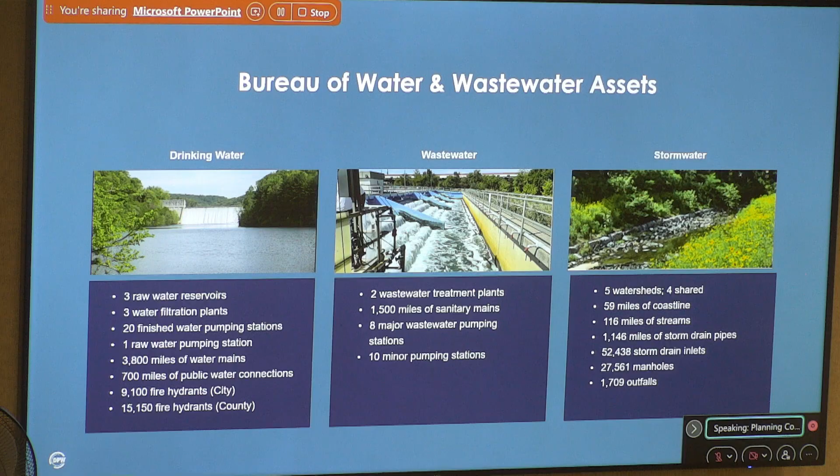So this is an extremely comprehensive, interconnected system. It's served us very well. For a long period of time, we did not invest as a city or region as we should have. A lot of that is coming back to bite us now, and that is why we have been making all of the improvements and investments that we have.

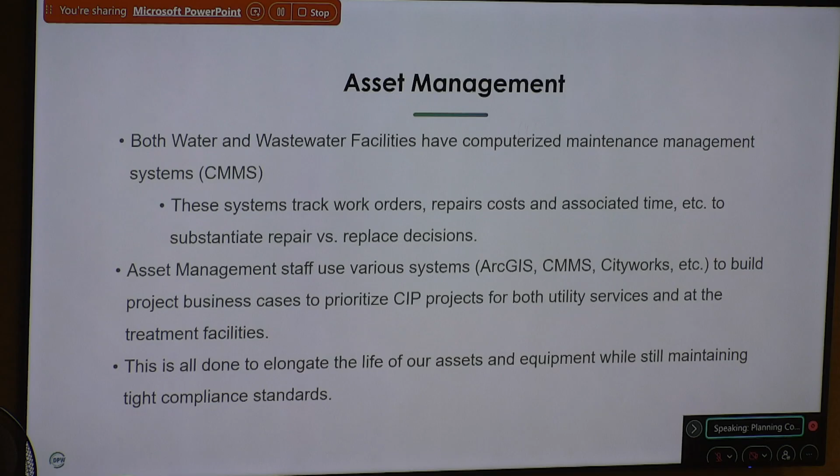So we are just like the biggest real estate holder in the state probably, or one of. Just a lot going on - huge system. If you haven't been to the places, we can invite you out to either a water tour or a wastewater tour. It's really something you don't pick up on until you're actually there and seeing, oh wow, if I go to this wastewater treatment plant I need a car to drive around it. It's so big - these are huge locations with just huge industrial operations.

Stormwater facilities, again, a fair amount of stormwater facilities throughout the city.

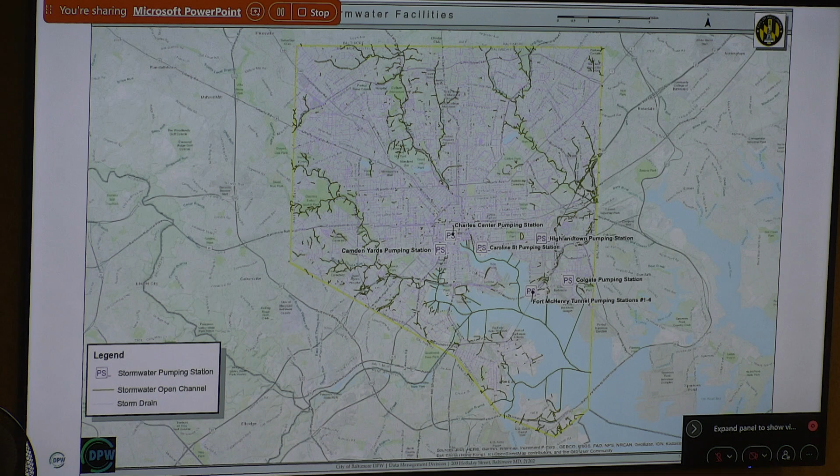Just an overall quick look at Baltimore City drinking water system. We have probably the greatest reservoirs, or one of the best sets of reservoirs in America. They really planned ahead, bought those reservoirs way back when, and so we pump that water source down. It enters the treatment plant facilities, either Ashburton or Montebello, to be cleaned, treated, and pumped. It's pumped out to storage tanks and held there until it gets out to you and your house. So happy to continue to provide you clean water.

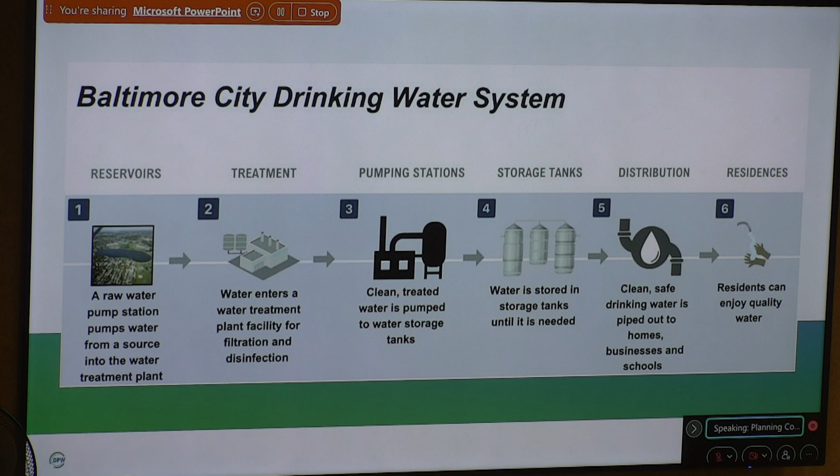It's intriguing because I told my kids about this job, and I said, I got this job and I'm in charge of the water and the wastewater. And they're like, we don't know what that means. And I said, well, there's pipes, and we do all these things. And I say, they just still think it's magic. They don't understand everything that goes into getting water into my house or the sewage leaving the house. But it is a process, and it is amazing.

Baltimore City wastewater treatment system - again, sewage will come from residential homes and businesses, travel through mainline sewers and pumping stations. It will go from the pump stations out to the treatment plants, and the clean water is discharged into water supply sources such as the Chesapeake Bay.

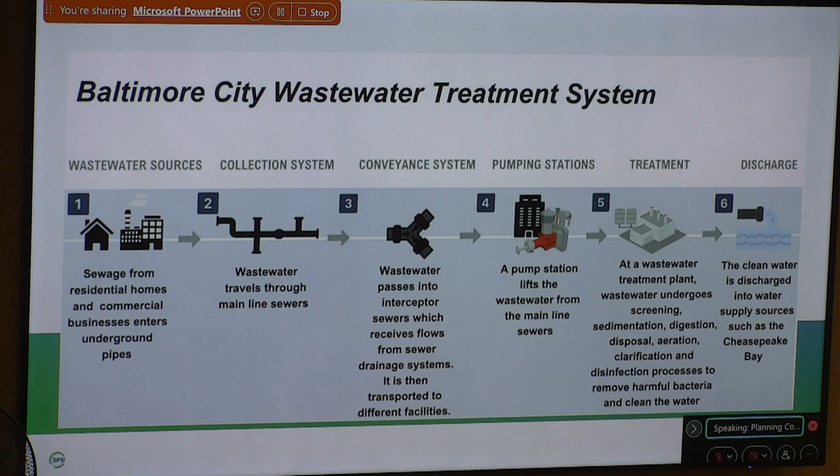So let's go into the wastewater utility, then storm and water, and get into it a little bit more. One of the biggest pieces behind our wastewater work is that we are under two consent decrees within the wastewater fund: a facilities consent decree to upgrade and make the plants all work, and a modified consent decree to make sure the pipes work and have enough flow so that they do not overflow.

The system was originally designed eons ago so that if a sewage system overflowed or got too full, it would overflow into a local stream. However, obviously times have changed and that's not the best practice, so we've been working to close those overflows over time, and I'll get into that as well.

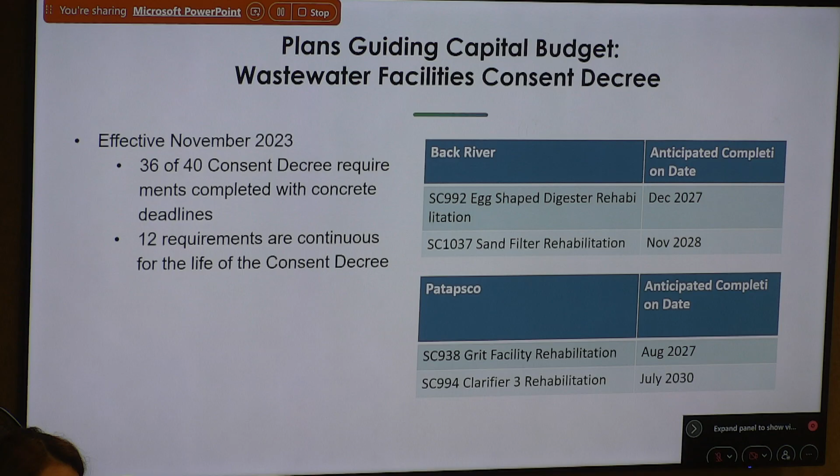The plants are working very well. This is showing suspended solids, which is an indicator of how well the plant is doing overall. We're really hitting our numbers. We've hit our permit numbers for both plants last year, and are really doing well at Back River, so much so that they're giving money back.

The state is giving us grants for high performance there, and Back River is looking even better this year. So we're keeping under the numbers, making sure that we provide the wastewater and hit the permits, and beat the permits as best as possible.

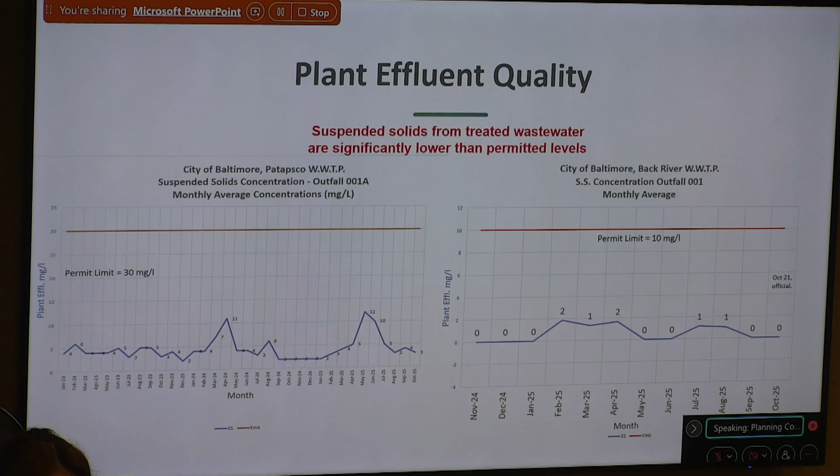Again, this keeps being a moving target over time. We posted for public comment on September 21st, 2025, updated plans. We have made improvements to reduce inflow infiltration, various system hydraulic capacity, and continued focus on closing all dry weather SSOs, that's sanitary sewer overflows, when the system overflows and spills out.

And we're working closely with Baltimore County on hydraulic monitoring so that we can coordinate with them. The system takes in a lot of sewage from the county into our plants, and the relationship has been improving in terms of really working together on the incoming sewage.

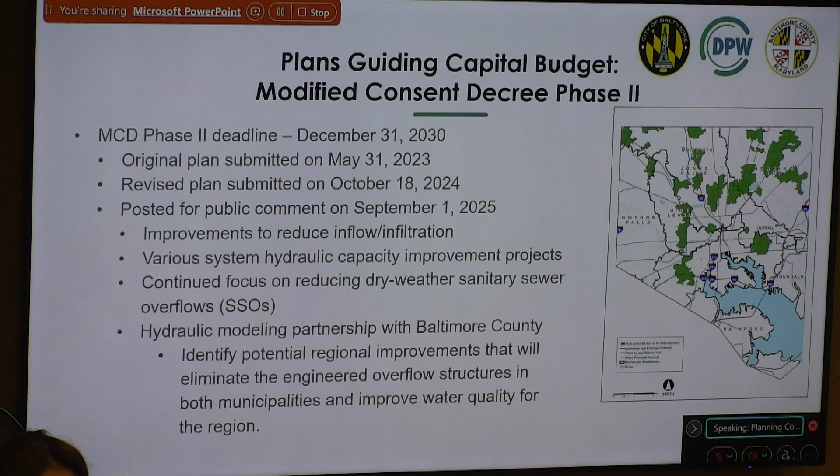We had a revised plan that we promulgated on September 1st. Plans and comment responses came December 15th, and we are looking for a new deadline because of the additional work needed to make sure that everything gets closed.

We're looking at this because of customer affordability, a balanced plan completion, financial constraints, and an adaptive management approach. So as we get to the questions, Paul can really get deep into this because this is a very important piece of what we do for the wastewater facilities.

Overall, we're looking at a large reduction over the last few years in the number of SSOs, which is the goal of the consent decree, and a large decrease in both the number and the volume coming out of them.

There are many projects, so we could have talked for like 16 hours straight about them. But one example: Phase 2, Herring Run Sewer Shed Inflow and Infiltration Reduction, Area A, estimated completion May 2027.

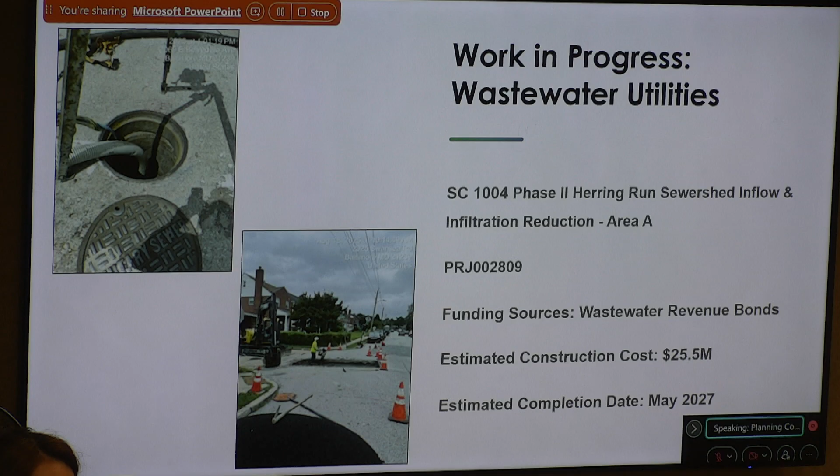SC 1020, CCTV inspection of sanitary sewers in Southern Baltimore City. A lot of the consent decree is actually us going and inspecting the sewer lines to make sure they're okay, and then repairing the ones that we find issues. So a lot of times we kind of set it and forget it in the past. Obviously, we can't set it and forget it. We have to inspect our assets and repair them.

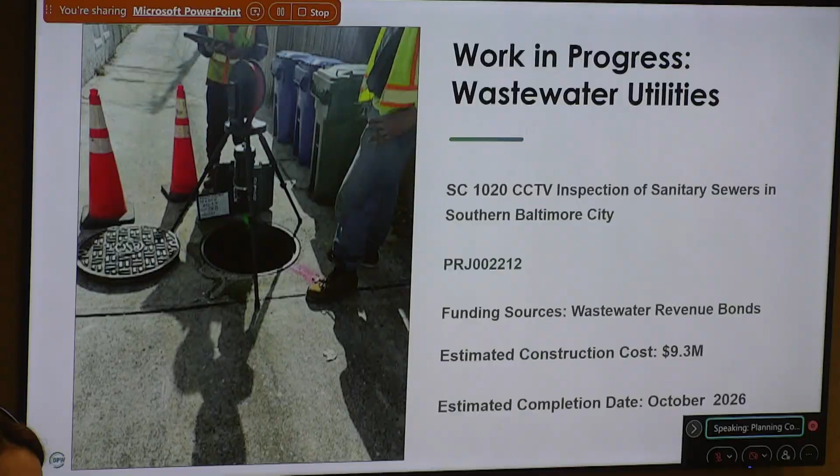Steve, to what extent are these third-party contractors, and to what extent are they city employees? I just don't really know what the balance is. I don't know, across the portfolio. I'm just trying to get a sense of it.

That really depends on what we're doing. So for the capital projects, it's primarily third-party vendors and contractors. The actual construction and contract work is primarily done by them, or nearly all. We have inspectors, inspection staff. We have some contract inspection staff, but we have a lot of in-house inspection staff. We are working to fill every vacancy on the inspection staff side as possible. We still have about 10 inspector vacancies left. We've been making a real push on that. So most of the work that we're going to talk about today is contractor work.

And I know some are smaller and some are larger, but at any given time, how many third-party contracts are you administering? 6, 7, you know? CCTV inspection. No, overall, the real contracts, the work being done. Okay, I thought you were making a 6, 7 joke like a kid, like my kids.

Across the utility, it's a couple hundred. Yeah, I would assume, yeah. Hundreds of contracts at any given time. Yeah, for sure. Thanks. I thought my kids would have loved that, Tim.

This is another interesting one, smaller than the larger. So, wastewater facilities design: we are designing a large number of repairs and replacements. Even though a lot of times we're talking about the consent decree, the facilities consent decree work was mostly at the plants. But before the plants, a lot of the wastewater goes through pumping stations, and you might not even know where these are. Sometimes if you drive under 95 on McComas Street, there's a little pumping station. Eastern Avenue is the biggest one - that's where the Public Works Museum is, that is a working pumping station, and it is amazing. So there's a lot of these pumping stations, as well as the wastewater plants, that need a lot of repairs upcoming.

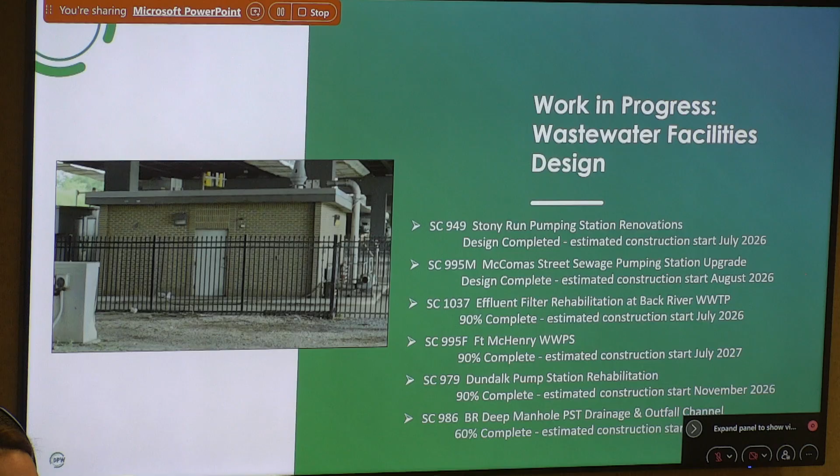Some other work in progress: Back River Scale House, electric distribution system at Patapsco, scum collection system at Patapsco, egg-shaped digester at Back River - that is a big one. You'll see the egg-shaped digesters; those help digest solids and will lead to a lot of cost savings. We have not been digesting, which means we have to find other ways to remove the solids that come into our system. And then renovations, more renovations, at Patapsco.

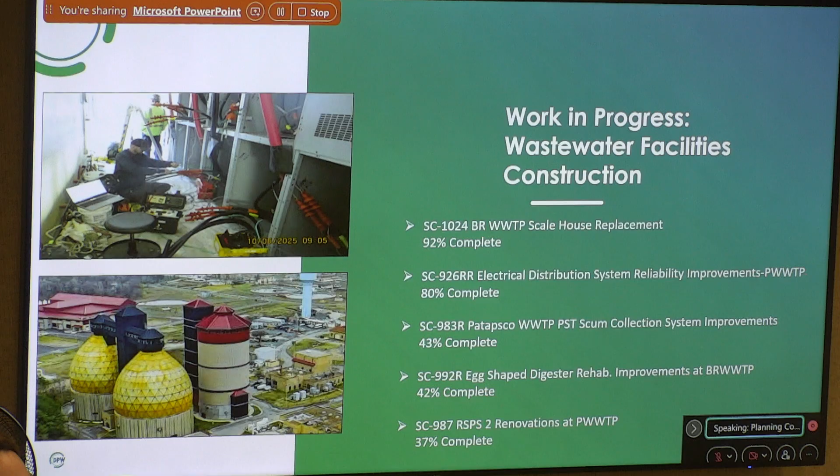Here are the requests, so you can look at all of them. We got a ton, just a lot going on. That's just for wastewater facilities.

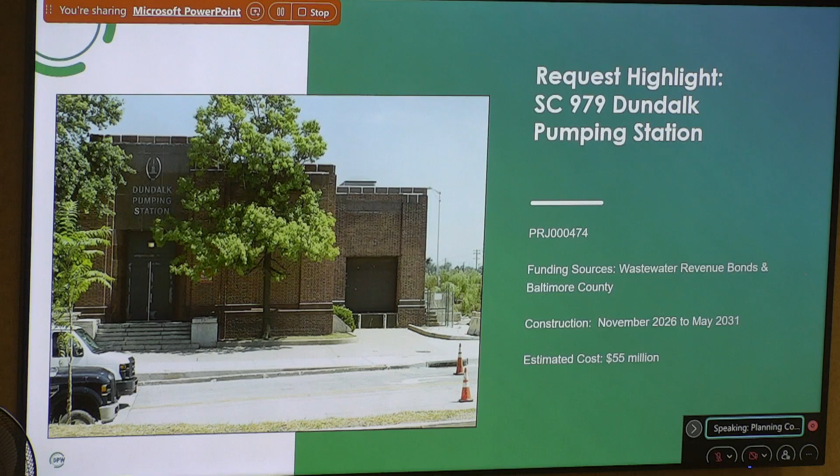Request highlight, Dundalk Pumping Station. We're working on this, hopefully construction next year. And we'll jump over to the stormwater utility.

A lot of the stormwater utilities work is based on the MS4 permit, which the state gives us following the Clean Water Act, covering impervious surfaces and whatever we're discharging into the streams of the city. So over time, not just us but the whole state, we have to improve the quality of water that runs off our streets, sidewalks, curbs, alleys, etc.

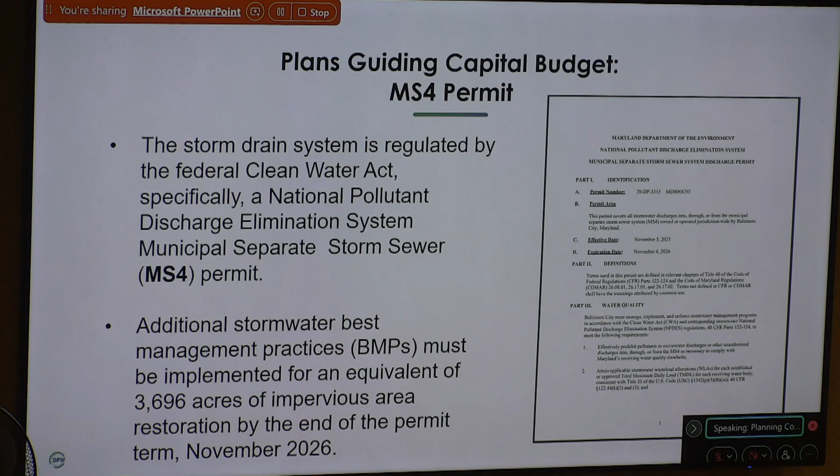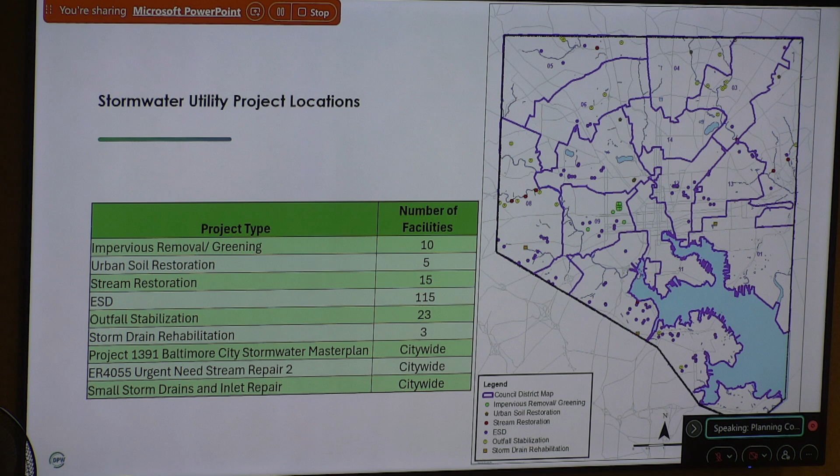We have a large number of small projects upcoming, some medium projects, as well as a large number of urgent stream and storm repairs that come up. We have a couple of shovel-ready projects that need improvement to ensure better environmental sustainability over time. We also have a fair amount in the bid construction phase, and a couple in the planning design phase. The upcoming ones are outfall improvements, and we have a lot of environmental site design projects.

We have to work closer with Recreation and Parks on these to improve our agreement on the amount of tree cover and related changes. Also, Maryland State implemented an act last year that requires increased public notification and a couple other things, so these need to be revised or fixed a bit at the end. So shovel-ready wouldn't be the accurate term at this point in time.

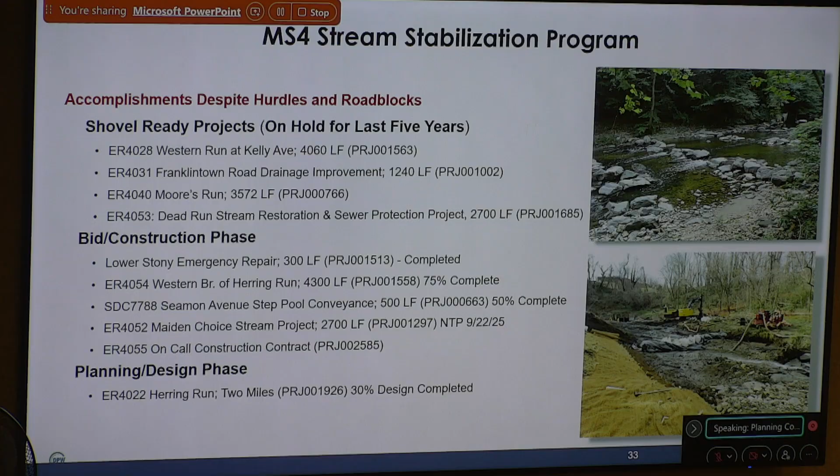So where are they in the capital budget, for example? Those projects that have been on deck? They're not this upcoming year. Are they in the budget in out years? Yeah, they're in previous years. This is stuff that we've already funded but not spent, because of these reasons. Correct. And this is focused on stormwater.

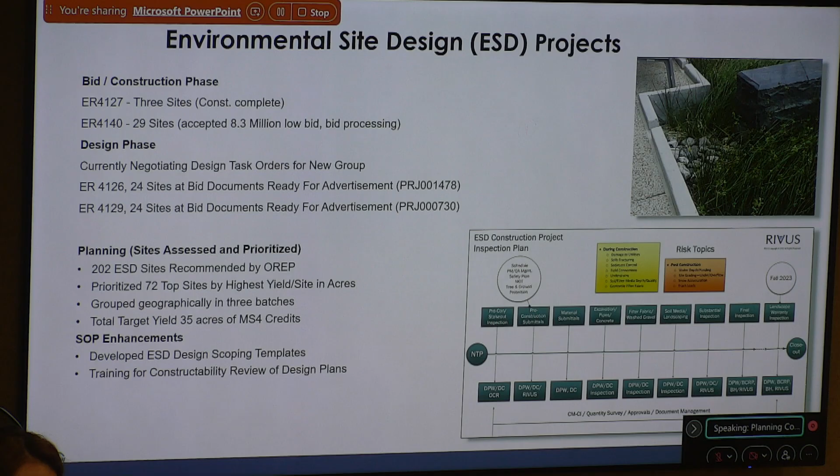So we have environmental site design projects. This involves a lot of little locations where we remove impervious areas and do bump outs. Some people like them, some people don't, but they are best practice.

About those sort of small projects, the environmental site design, impervious removal - those projects have big community impact, and I'm wondering how these sites are selected and how that's coordinated and where that work happens. A lot of times we're looking for sites that have the best bang for the buck. There aren't always a lot of opportunities, but if we find a school or other site with a lot of impervious surface that wants to remove it, that would be first. We also look at other places where it would work.

We're looking for larger spots, we need more square footage. Sometimes we'll add a small thing here or there, but a lot of times it's got to be near a stream or something else that makes it worthwhile. It's not really as cost effective to just go neighborhood by neighborhood hitting bump out after bump out. Sometimes a community will request one and it can come in with a DOT or another project, but we need as big spots as possible to make it cost effective, because we need more space for credits.

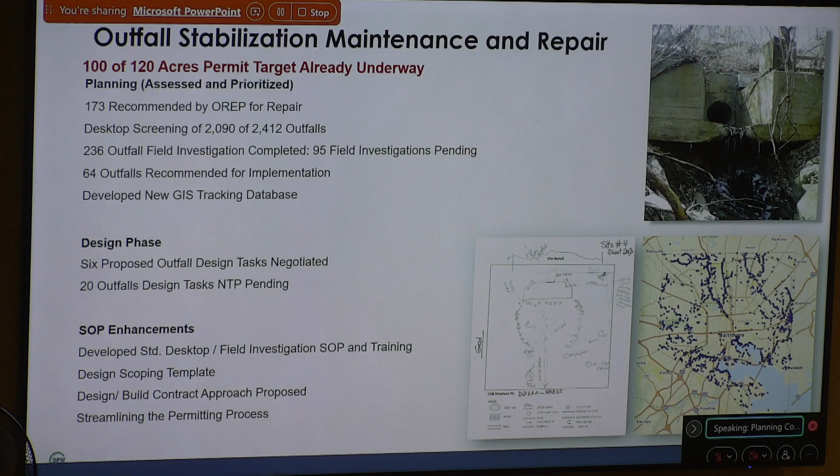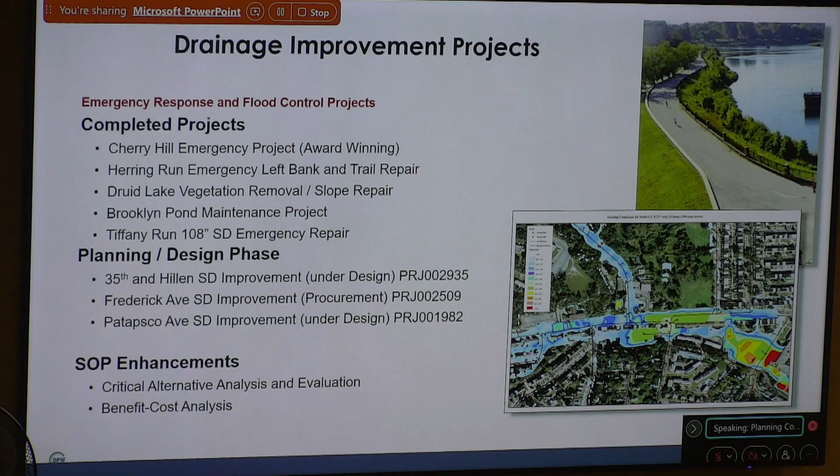So one of the largest projects that we've ever done in the stormwater realm is, of course, the Tiffany Run storm drain. A couple of years ago, the whole area around the lake got a big hole by it because of a huge storm drain. That also messed with the water pipes, and it was a very massive job, ended up costing $30 million. But I want to give kudos to the team for keeping the city in water, because that's right near a huge pipe that feeds a major portion of the city. That would have been very detrimental if that had taken out the water pipes.

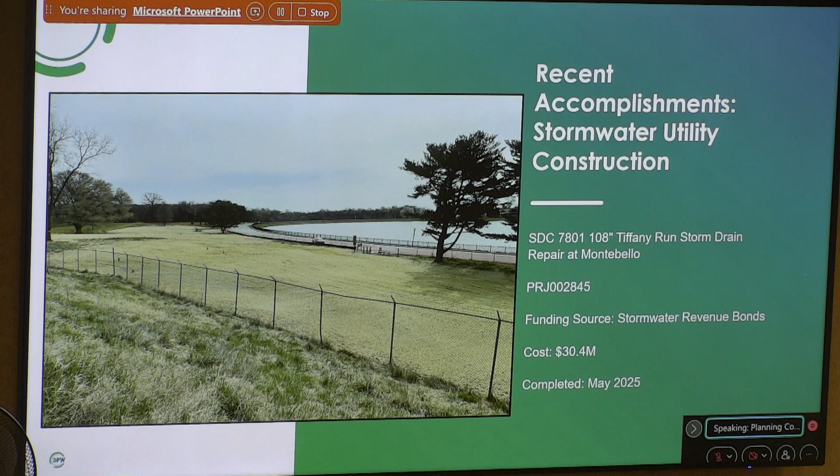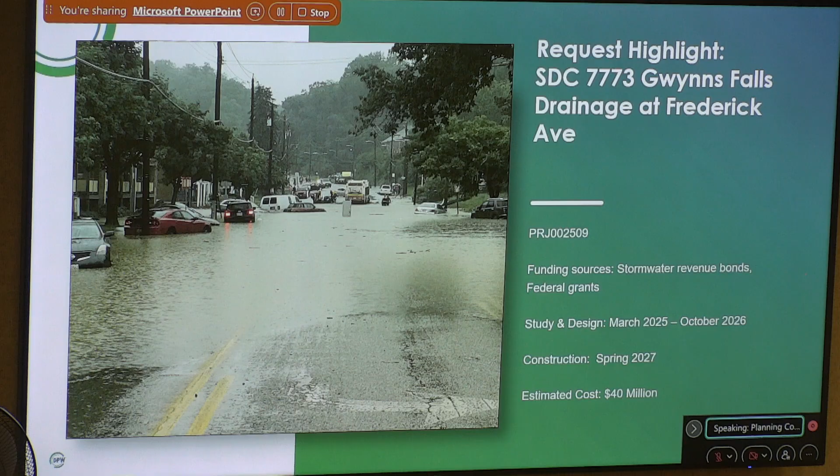Just another highlight, Gwynns Falls drainage at Frederick Avenue. This is a large location that floods once every couple years, but it does flood hard when it does. So we're looking to fund this in upcoming years.

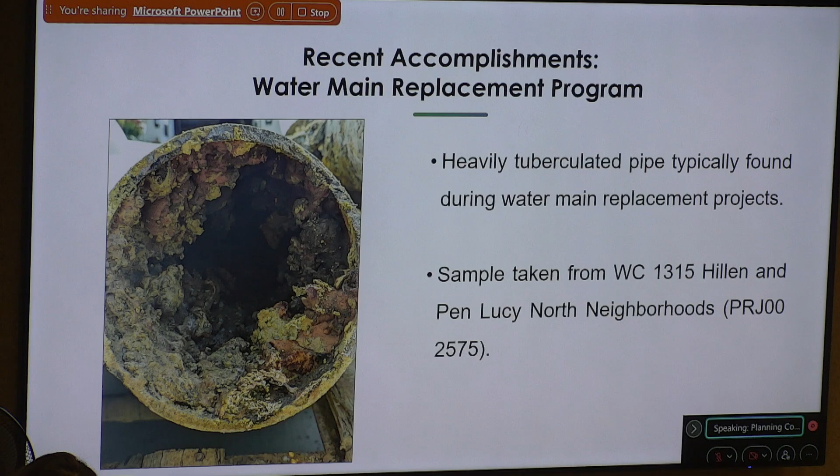Or we may be replacing, which we've been doing a lot as well. So far this fiscal year we've replaced 9 miles. We have a goal of 15 miles per year. We did 21.2 miles last year, so a lot of miles replaced. We've been focusing on decreasing breaks or finding locations with low water pressure issues. It's a big project, very expensive, but it's needed. It would probably be many more miles if the money was available, but we do what we can. I want to really thank the team for getting so many miles done over the last couple of years. They have been working really hard.

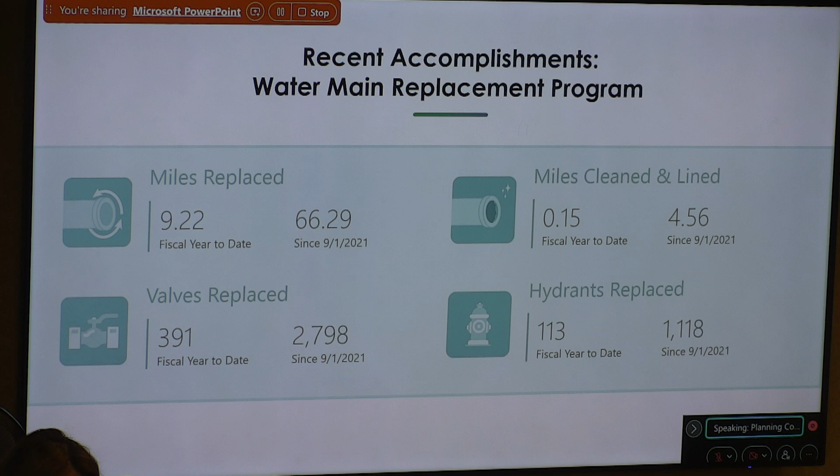Mr. Sharkey? Yes. Have you mentioned the third-party contractors that do most of this work? You also mentioned the shortfall in inspectors. What are the results that you're seeing in terms of quality control? And does that limit production at all?

No, so we have consultant inspectors when needed, and that's flexed out. My goal is to get rid of those consultant inspectors as much as possible. There's never going to be none, but I want it to be a minimal amount. We have about 10 vacancies to fill. I think we'll have to consider and come up with a financial plan, maybe 10 more after that. But we don't want too many consultants, because in the future there are times we have more inspectors than work. So that's part of it.

And just to also mention about the water main replacement, we are also the first, and I believe only, agency to participate in the unbundling process. We've trained a number of small minority business firms through one of these contracts where R.E. Harrington, one of our big local contractors, came and trained 5 smaller contractors to do more of this work. That's wrapping up, and I think that's a really great program to mention.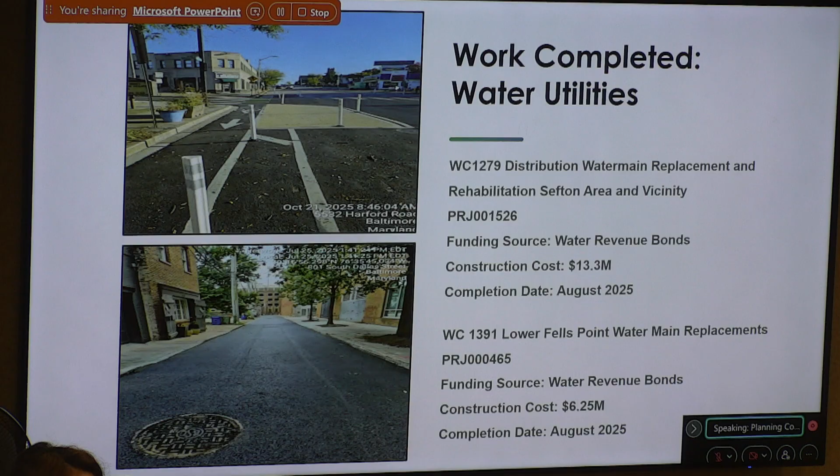So here's a couple locations. There's a lot of areas in the city. Lower Fells Point, Sefton—there's a lot of areas ongoing at nearly all times in the city. Also Hunting Ridge, Uplands, and this comes from water revenue bonds. Yale Heights, still working over there.

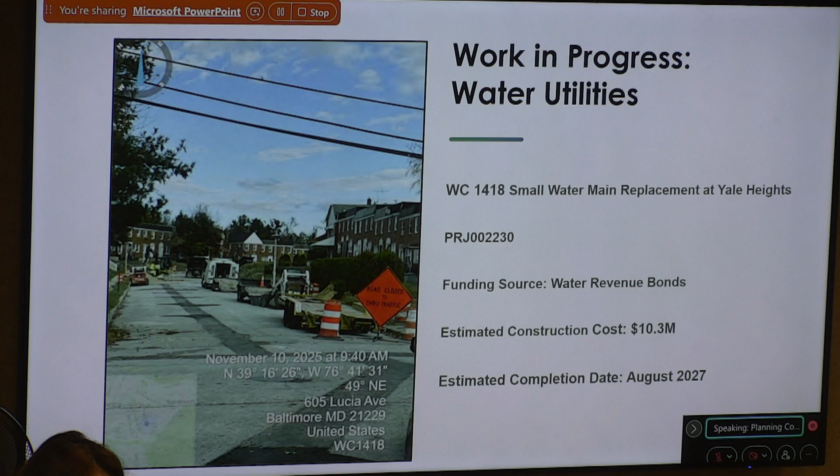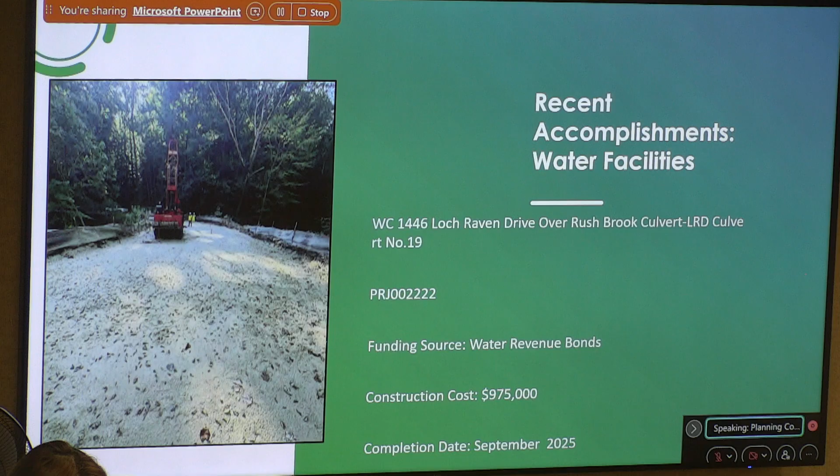And just a couple water facilities. We've got Loch Raven Drive over Rushbrook Culvert. This is a culvert right outside of the Loch Raven Reservoir that needed to be repaired. That's another good one where we're coming in, repairing what we need to repair, because we do own the reservoirs as well.

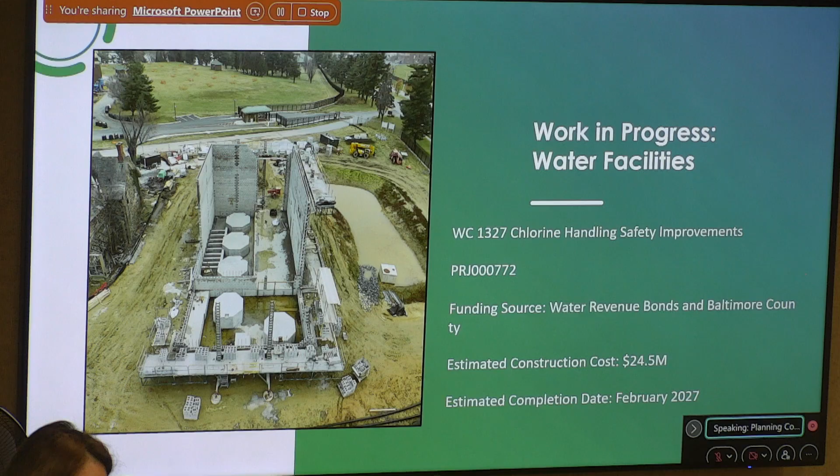Also, we didn't even get into the plants that much, but chlorine handling safety improvements—we need to increase or improve through capital our chlorine handling safety, so that's an ongoing capital project. We have to keep on modernizing. It's really amazing how our forefathers or pre-engineers made an amazing system way back when, but that doesn't mean we don't also need to fix the old things and upgrade them as we go for safety, because we want chlorine to be as safe as possible at the plant.

Also, Montebello Filtration Plant 1 underground filtered reservoir structural repair.

This is actually really dope. So I went to this one, and it felt like the Mines of Moria, this is for the Lord of the Rings fans. It's really like you're walking through some amazing place, with vaulted arches 20 feet above. It's like, we don't build them like that. What year do you think they built that? Over 100 years ago. This was basically a water storage reservoir underneath the reservoir, and it's just outstanding to see. But we had to repair it, of course.

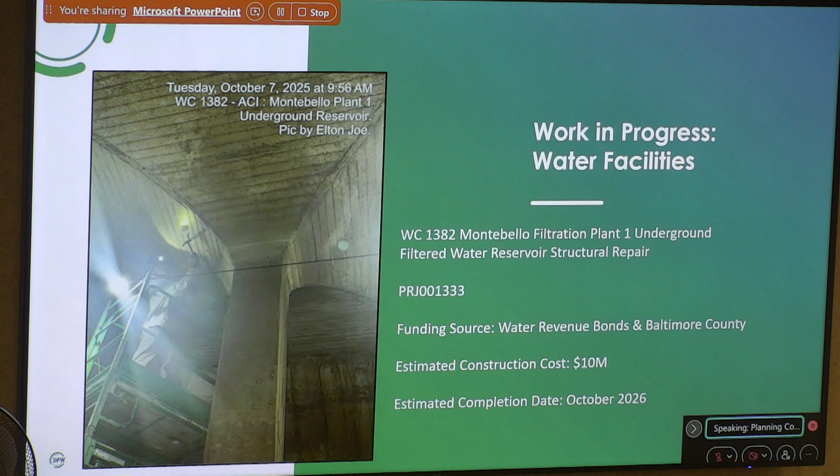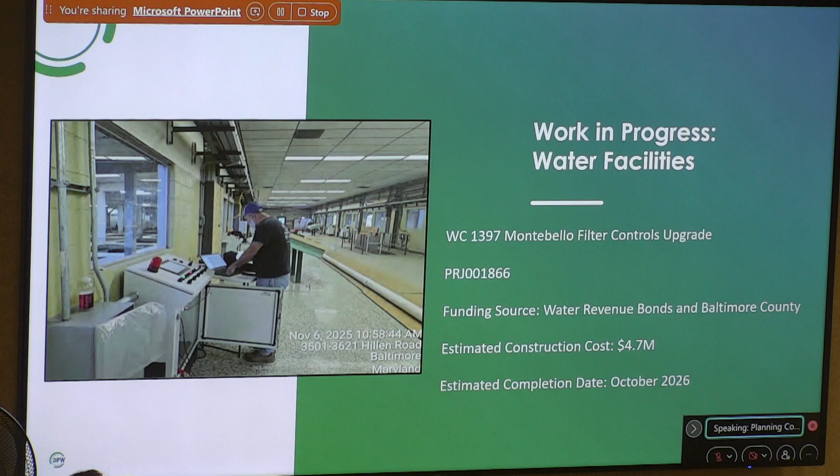Also Cromwell Pump Station, which again, more work. Montebello Filter Controls upgrade. There's just a lot of things that age and re-age and age that we continue to repair. We also hit a big one, and luckily I was on vacation at the time.

So thank you to Tim and Paul for jumping in. A 30-inch water main break, a huge water main break up on York Road all the way out in the county. Just want to thank everybody.

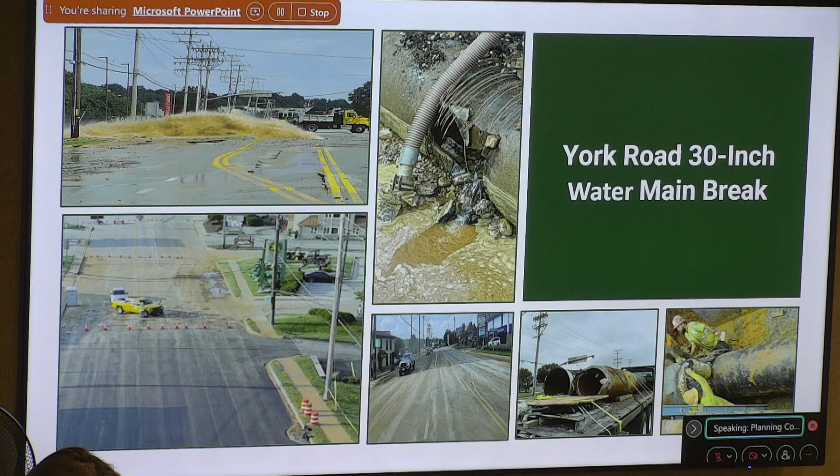We do have a really excellent urgent needs staff that really jumps on things, and we work well with contractors in those cases for some of these larger jobs to get out there and repair large breaks like this.

We also had a really interesting break, a 40-inch leak right downtown, right at Charles and Lombard. That was a big pain in the butt, but the crews went around and figured that one out. It was very much a science experiment to figure out exactly what was happening where. So that was a good one.

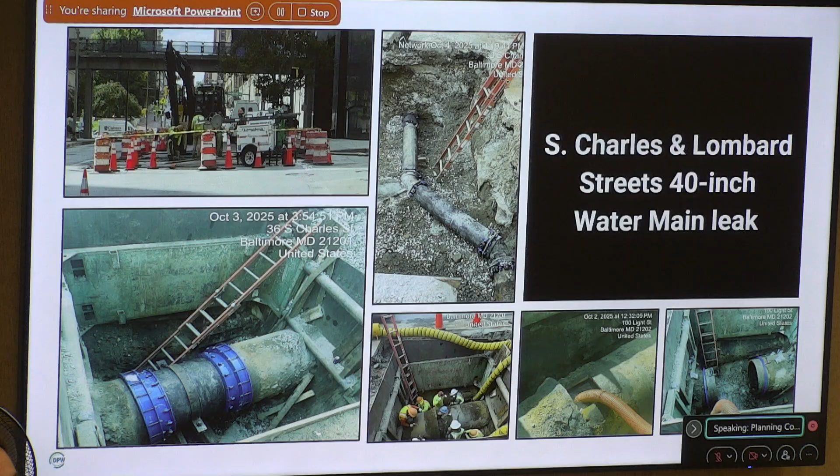And then another one, just a 24-inch, but those are some of the bigger ones. There are breaks every day, and we're addressing a large number of them both through in-house crews and contractors.

Recent accomplishments: lead and copper rule revisions, just want to highlight this real quick. We've come up with a model to review lead and copper lines. Through the EPA, we have to work with residents for them to try to survey their lead lines, because many of the houses have lead lines themselves. So we look for them to do that. We came up with a predictive model, and we're using it to see where to go next to look for lead lines.

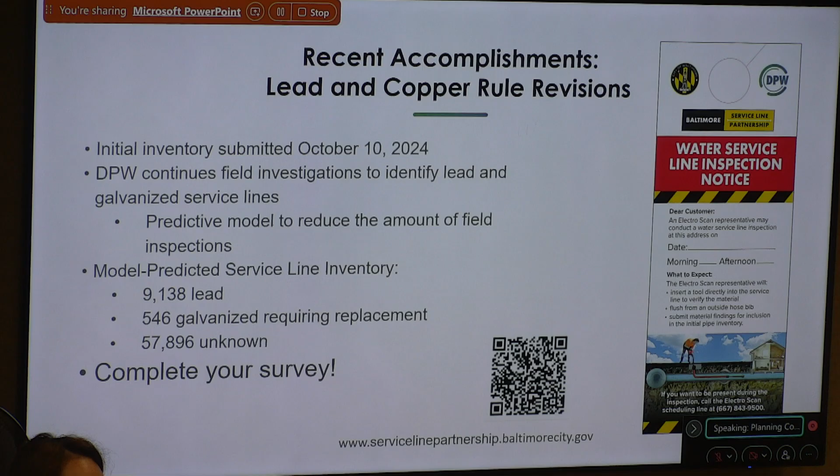And we got this cool thing called the swordfish, a tiny little camera that goes in and scopes the line to find if it's lead or not. Then we'll be replacing the ones we find. Although so far we've been pleasantly, knock on wood, pleased with the number of lead lines, it has not been as much as initially thought.

A little bit more on the upcoming year. We got pump controls, more meters, more water main, and a couple of large water main replacements.

Also looking in the upcoming years to fix the Montebello laboratory. It is a very old laboratory. The laboratory is somewhat one of the unsung or unknown heroes of DPW. We have chemists, we have biochemists, and as the water comes in, or wastewater, they have to check it to make sure it meets state standards. We actually have state certified labs that do a number of tests, so we need to keep that going. Just a lot going on the water side as well.

Just a couple highlights: Ashburton water pumping rehabilitation.

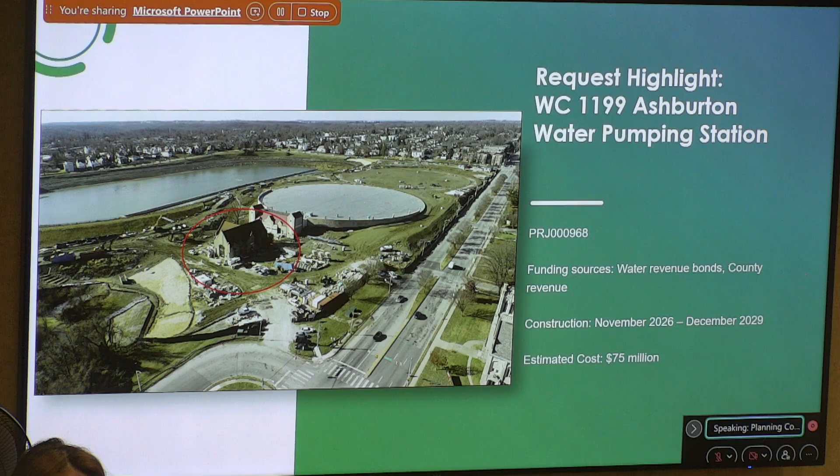Steve, this is a good chance for me to ask you, can you give us a quick update on Ashburton and Druid Park Lake in terms of just where that stands and will it ever be done, those kinds of things?

Admittedly, those things. Come on up if you don't mind, Blake.

Admittedly, those projects are dragging a little bit.

A quick intro, if you don't mind, of yourself. My name's Blake Suka. I'm the Deputy Chief of the Office of Engineering and Construction.

So Druid is slightly ahead of Ashburton. They just finished the paving out there recently. We have to do some final walkthroughs, but that park should be opening within the next month or so. Ashburton, unfortunately, the contractor didn't quite finish everything in time for winter. Some of the work remaining is weather dependent, so that one will probably finish in 3 to 4 months before we can open the park. But the facilities we installed, the underground tanks, have been completed for some while and are in operation. Been in operation for a year, 2 years.

I will say the Druid Hill Park one looks terrific. We've used the lake loop trail, whatever you want to call it. And I've seen the unfinished park next door. It's good to know it's going to be open soon, but I was just trying to get a feel for what the schedule is, so thanks.

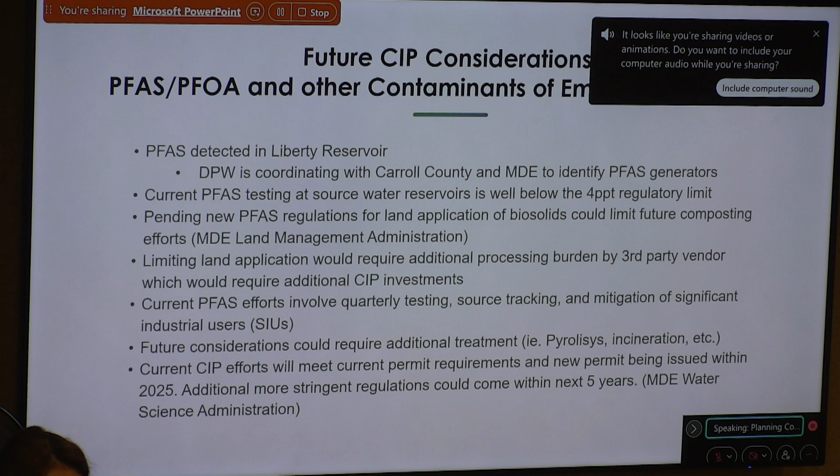Also, just want to shout out to Marco. Marco is the head of the DPW's Equity Committee, and we've got the number one best equity committee in the city. Marco meets monthly all across the city and gives a lot of teaching and learning to the group. So, just to say, our equity committee is better than yours.